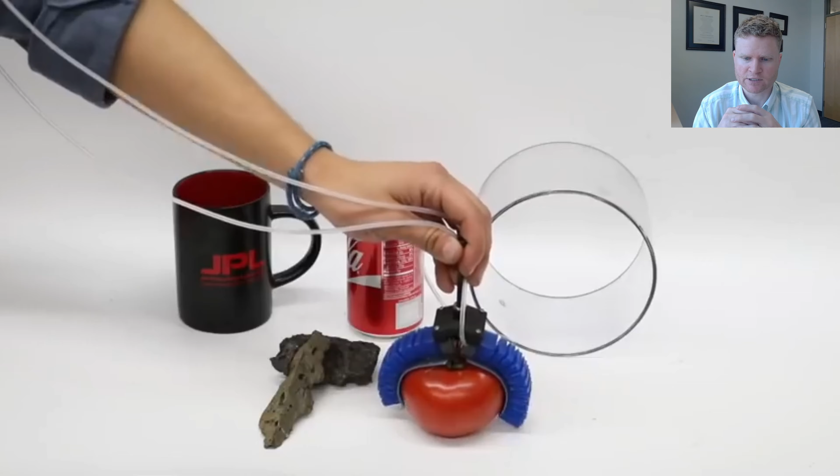That idea kind of reminds me of this video. Now in the video you can see a soft robotic gripper. It's got pneumatic actuation and different soft fingers that it can use to pick up different objects. You can imagine, because of the different actuation and kinematic structure of this system, that you might want to develop a different controller for your gripper than what you have for the other components of your rigid robot arm. So this will be one example of us developing different controllers for different components of our robotic system.

All right, so I want to talk about that a bit more in today's lecture. First, I'm going to talk about how you choose controllers for each individual robot joint. And then second, I'll talk about how you can make sure your control gains are going to be stable when you use these linear controllers.

But instead of thinking about the entire robot at once, what I'm going to do is break it down and try to develop different controllers for each one of these different links and joints. So let's focus in on this first component.

Now, I recognize that this has a revolute joint and a link attached, and I can model that dynamically as a mass damper, where the mass is the combined mass of the link and maybe the motor, and this damping is perhaps caused by some sort of friction within that motor.

I can actuate that motor with a force or torque tau, and I can change its position theta. So I've taken this coupled, complicated robotic system, and I'm looking at just a single joint, which I can now model with linear control techniques.

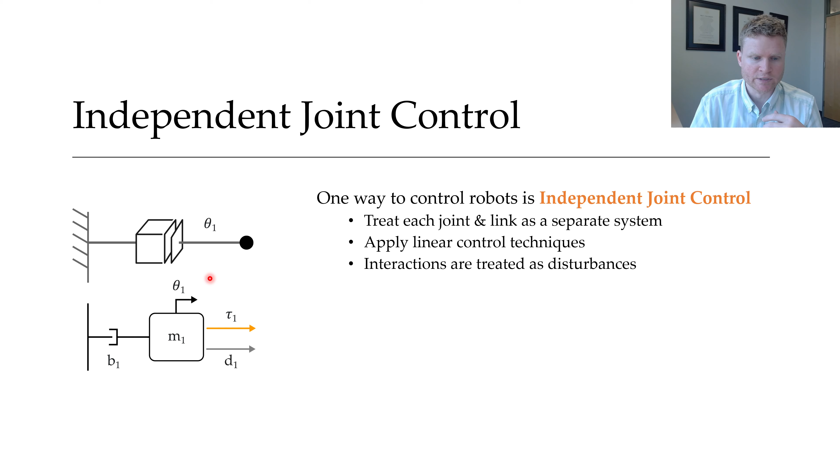The disadvantage of this approach is that I'm ignoring any interaction between the joints, and those interactions will now become disturbances that are applied to this link. So that would be this disturbance D1 right here.

In practice, it might look something like this. So let's focus in on this link of my robot arm. I've got some desired joint position, let's say 45 degrees. With my encoder or other sensors along my robot, I measure its current joint position. I send the difference to my controller.

This could be something like a PID controller. It'll output a force or torque, which I send to my motor, and then I use that motor to change my joint position in real time.

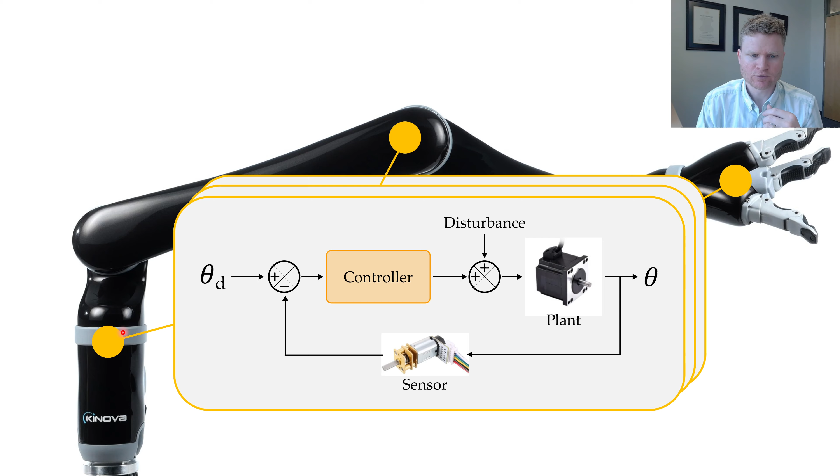I don't just do this process once. I do it n different times, once for each individual link of my robot arm. And that's the main idea for independent joint control. Breaking down my robot, looking at each of these individual joints as something that can be modeled with our linear control techniques, and then using these techniques to develop a stable and efficient controller for that joint.

So if we understand that general pipeline, how do we go about designing joint controllers that are going to work well for these specific joints? Well, the first thing we need to think about is something called stability.

And the reason stability is so critical is that I want to make sure that as I'm controlling my robot, it goes towards these desired positions. It doesn't start to oscillate and maybe break my overall robotic system. So the first thing I'm going to check for is the stability of my closed loop controllers.

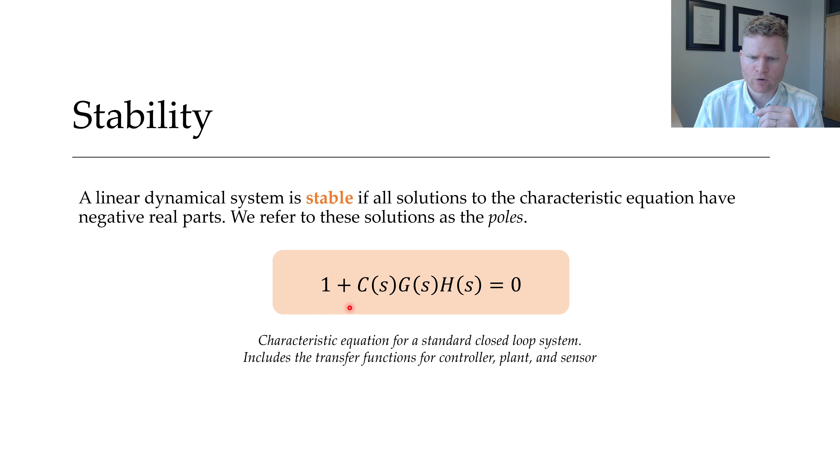Now, a linear dynamical system is stable if all the solutions to the characteristic equation have negative real parts. And I refer to those solutions as the poles. So here, this is my standard characteristic equation for our closed loop systems. It's 1 plus CGH equal to 0. And this includes the transfer functions for my controller, my plant, and my sensor.

To give you an example of how this could look, let's look at this equation right here. Imagine that your characteristic equation is s plus 2 times s minus 5 equals 0. Maybe pause the video and think for a second, if you had that, would you have a stable system? Hopefully you realize that no, it would not be stable.

One of my solutions is going to be negative 2, which has a negative real part. But the other solution is positive 5, and that has a positive real part. And so overall, one of my poles is in the right half plane.

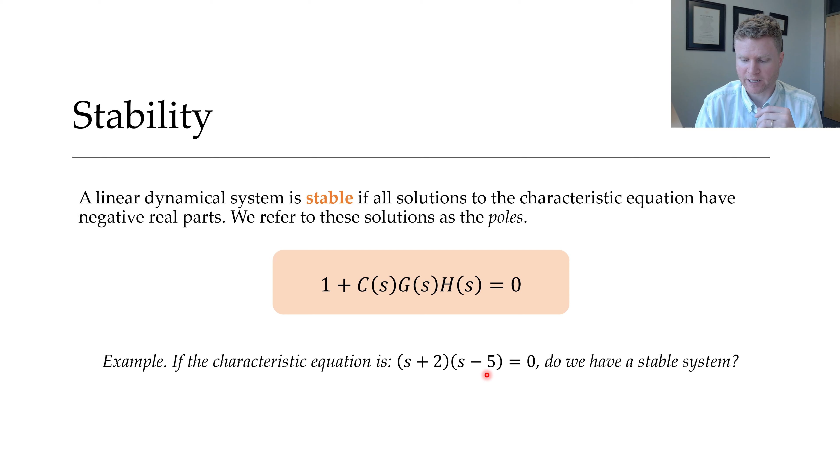Again, kind of a recap to controls, but if you've forgotten about the left half plane and right half plane, I can show you what they mean right here. So I'm plotting the real axis versus the imaginary axis. And then with these x's, I'm marking the solutions to my characteristic equation.

I'm marking the poles. Now, if a system is stable, all of your poles will have negative real parts. In other words, they will all be to the left of this imaginary axis. So you can see them over here. Now, this analysis is occurring in the Laplace domain, but if you want to think about it in the time domain, this just means that my system is going to converge to some steady state over time.

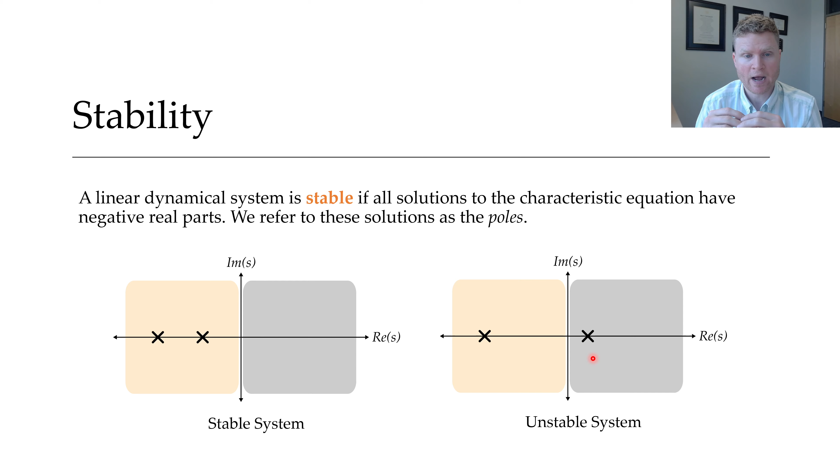Now on the right, I have an example of an unstable system. One of my poles is in the left half plane, and the other pole has a positive real component. So if any of your poles are in the right half plane, your overall system is unstable. What this means in the time domain is that you're going to have some exponential that is positive, and it's going to be increasing as a function of time. So the position of your system will continue to increase and eventually break whatever system you have. So stability is going to be really critical when we're trying to control our robot joints.

So how do I go about figuring out whether a given controller is stable, or how I can pick the gains for that controller in order to make sure they're stable? One really nice rule we have access to is the Routh-Hurwitz criterion.

The way you apply this criterion is you take your characteristic equation and divide it by the leading coefficient, so it looks like this. Let's say your characteristic equation is 5s squared plus 2s equals 0. You would divide that whole thing by 5, so you'd have s squared plus 2 over 5s equals 0. Then you'd have it in the right form to apply the Routh-Hurwitz criterion.

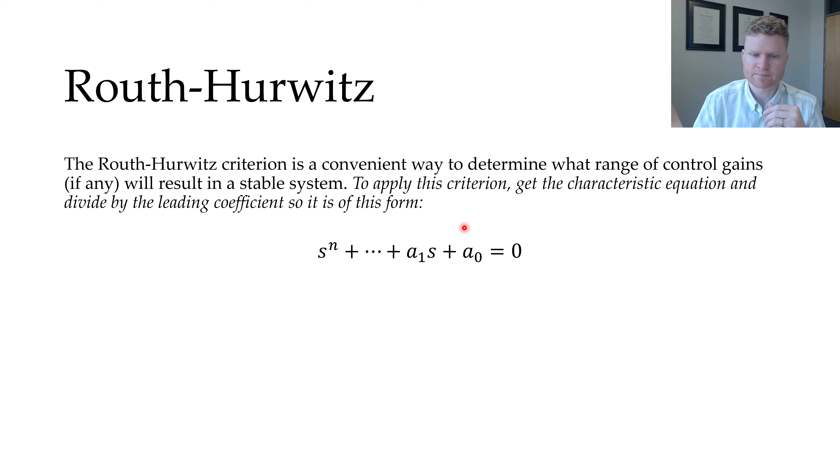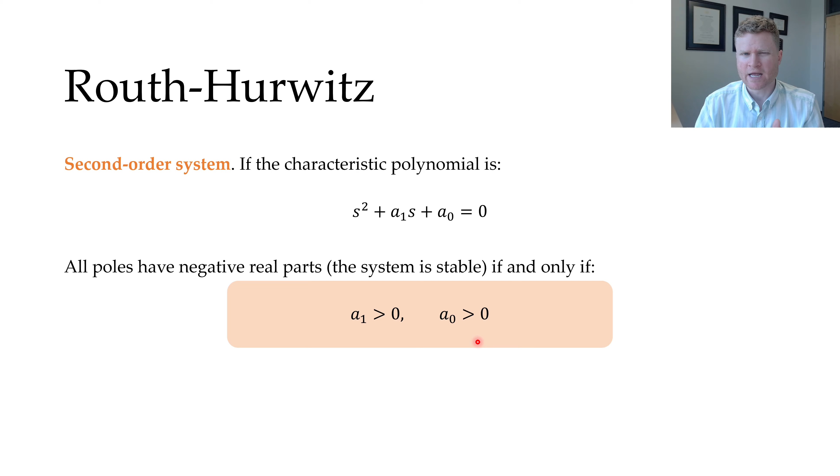Now, there are different rules depending on the order of your system. If your characteristic polynomial is a second order system, like this s squared right here, then this is the rule you'd want to apply. You'll have it of this form, and you check these two coefficients, a1 and a0. If both of these coefficients are positive, so a1 and a0 are both greater than 0, your system will be stable. You can pick any control gains that satisfy these conditions and still have a stable closed loop system. If this condition is violated, the system is unstable. It's a really useful condition to check, and you don't actually need to find the poles for this approach.

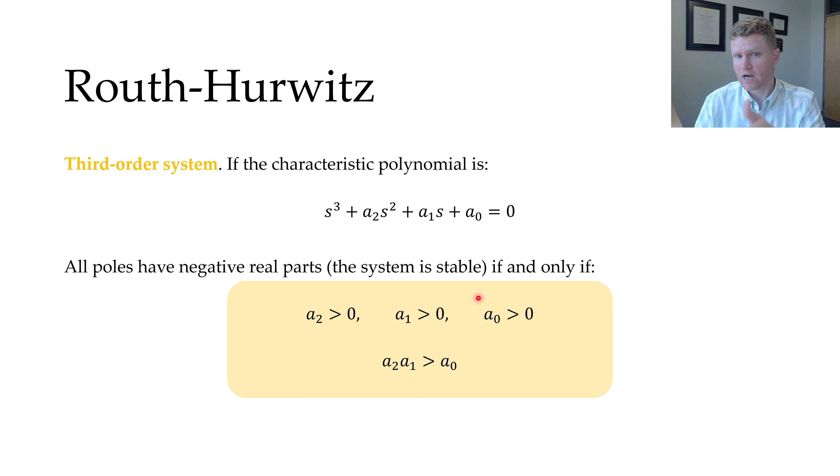That's for a second order system. Now if you've got a third order characteristic polynomial, like what you see right here, so you've got s cubed somewhere, then you'll be looking at the coefficients a2, a1, and a0. Again, they all have to be positive. Then there's a second rule that a2 times a1 better be greater than a0. If all of these are satisfied, your system's stable. If any of them are not satisfied, you have an unstable system. The same logic applies if you go to a fourth order system with an s to the fourth power in your characteristic polynomial. This can extend to higher orders, but I'll stop here with the fourth order system. Here are the rules you'll need to check to see whether or not your controller is stable.

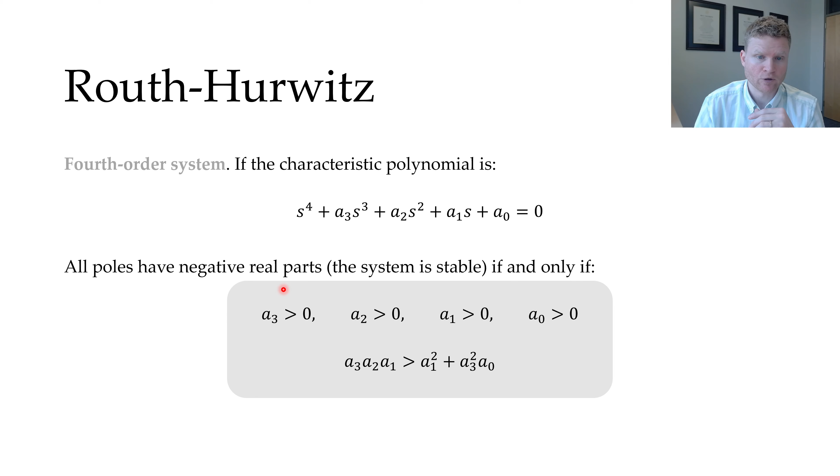Let's practice this concept with an example, and use the Routh-Hurwitz criterion to design a stable controller for our robotic joint. Let's say I've got one link of my robot. I've isolated this individual link, and recognized I can model it something like a mass spring damper. Here's the mass of that link and joint, modeled with a spring constant K, and a viscous friction, call that B. Here's the position of my link, and here's the torque I'm trying to choose in order to control this link. Again, the overall point of control is I want to make my system move wherever it is I want it to go. So I want to pick joint torques that will move my robot to some desired position.

Okay, so I've modeled my system. Again, this is a single input, single output system. My output will be my measurement of the joint position theta, and my input's going to be this torque that I'm choosing to apply to my link. So that's the system drawn here, and over here you can see the transfer function. This is my plant g of s, and it's 1 over ms squared plus bs plus k.

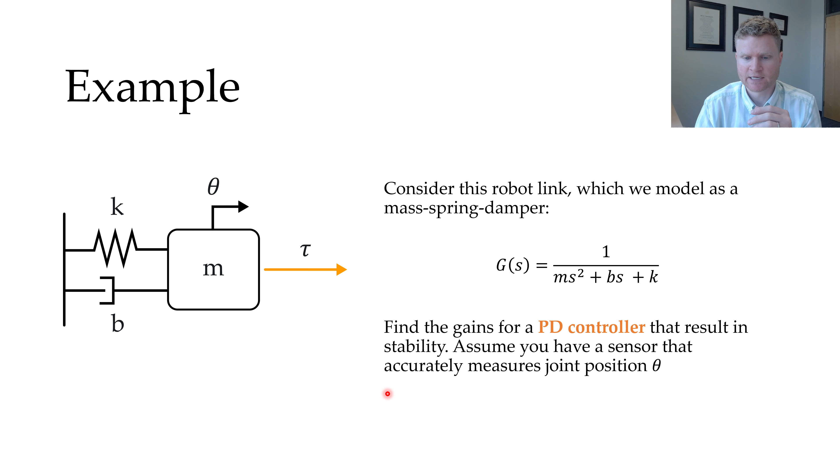In the problem, I'm asking you to find the gains of a PD controller that will result in stability. You can assume you have a sensor that accurately measures my joint position theta. So the first step is, let's see if we can write out the transfer functions for our controller and our sensor. For the controller, I mentioned I want to look at a PD controller. This is one of these PD controllers written in the Laplace domain. I have my proportional gain Kp, and that'll act based on my error in position.

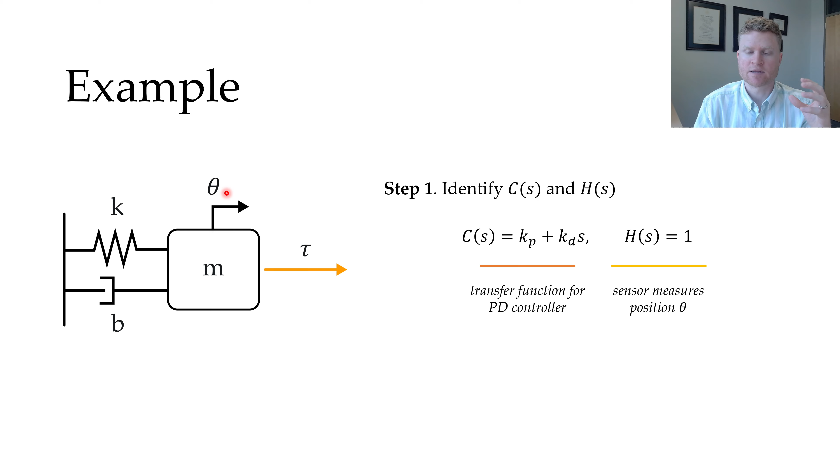And then I have my derivative gain Kd, acting on my error in velocity, so I've got my PD controller. Then on the right, I've got my sensor, and this is just H of s equal to 1, because my robot can accurately measure theta, so the sensor is just passing theta directly back for me to make control decisions.

Okay, now that I have G, C, and H, I can evaluate my characteristic equation. So right here is my equation for the characteristic equation: 1 plus CGH equals 0, and I can just plug in C, G, and H, and I end up with what you see on this second line.

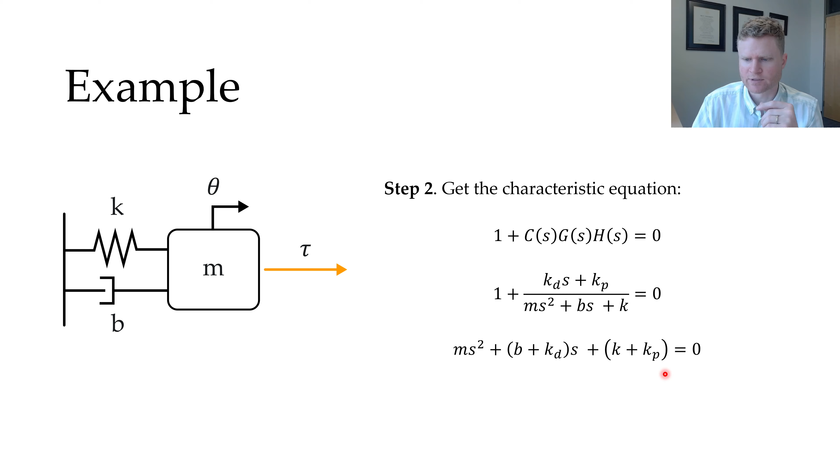I've got 1 plus a fraction, so to simplify this further, I'm going to multiply both sides by the denominator, this ms squared plus bs plus k, and I end up with what you see right here. So this is my characteristic equation, simplified down.

Now, my last step is I divide by the leading coefficient, so I divide all my terms by m. So I've got s squared plus, we'll call this a1 times s, plus a naught equals 0. And now I've got a second order polynomial.

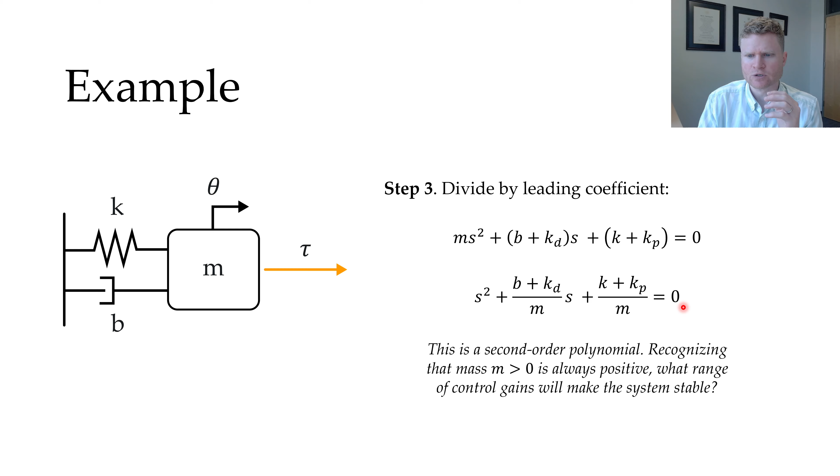So I can apply the Routh-Hurwitz criterion to check and see if this thing is going to be stable, and if so, what range of control gains will make it stable. Maybe you want to pause the video or flip back to the previous slides where we talked about these second order rules for the Routh-Hurwitz criterion, and you can see exactly what we need to do here. Hopefully you recognize that we can make this system stable if we satisfy two rules.

We acknowledge that the mass of my system is always going to be positive, and so the rules I need to follow are: B plus KD has got to be positive, and K plus KP has also got to be positive. So I can pick any range of control gains for KP and KD, so long as they satisfy these two rules. Now, that's for stability.

If you want to make sure your system has good performance, meaning it goes to that desired position quickly and accurately, you're going to want to tune these gains a bit more. That can be a trial and error process, but in general you probably want to increase your gains for more rapid responses. But when working with a physical robot, there's an upper limit, because as you increase these gains, you're asking your robot to deliver more torque more rapidly, and at some point you'll reach the limits of what your robot can actually achieve.

Okay, so this is an approach I can use in order to find the range of control gains that are going to be stable for my individual joint.

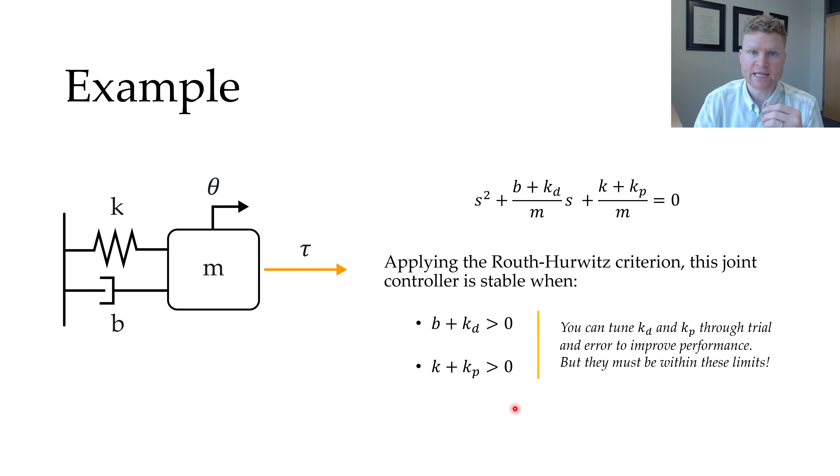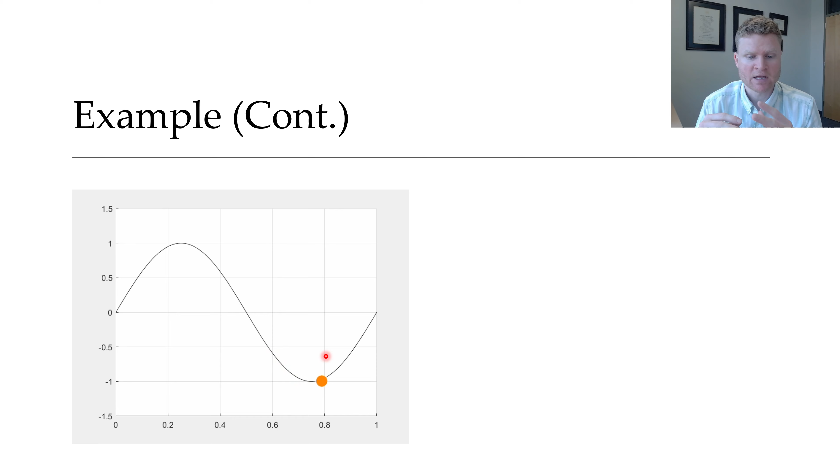Here's a visualization of that process. On the x-axis, I have time, and on the y-axis, I have my joint position. This line you see right here is a trajectory that I want my robot to track, the position I want for this joint as a function of time. In orange, I'm plotting the actual position of my robot using the controller we just talked about. You can see I've picked control gains that are stable, so my robot pretty accurately tracks the reference trajectory. This is us using control to move my robot joint to do the task I want.

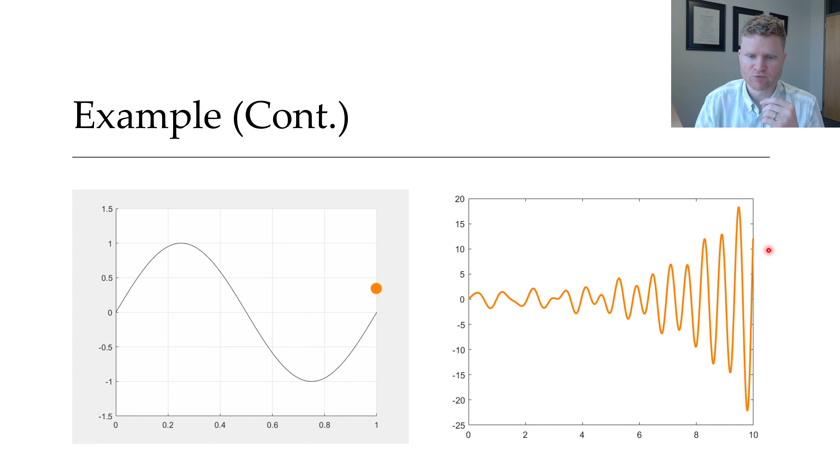Okay, so in today's lecture, we talked about how you can choose controllers for each individual joint of your robot, and how we can use linear control techniques to pick those controllers. This was a lot of recap of linear controls, and we highlighted the Routh-Hurwitz criterion and how you can use it to make sure your controllers are stable.

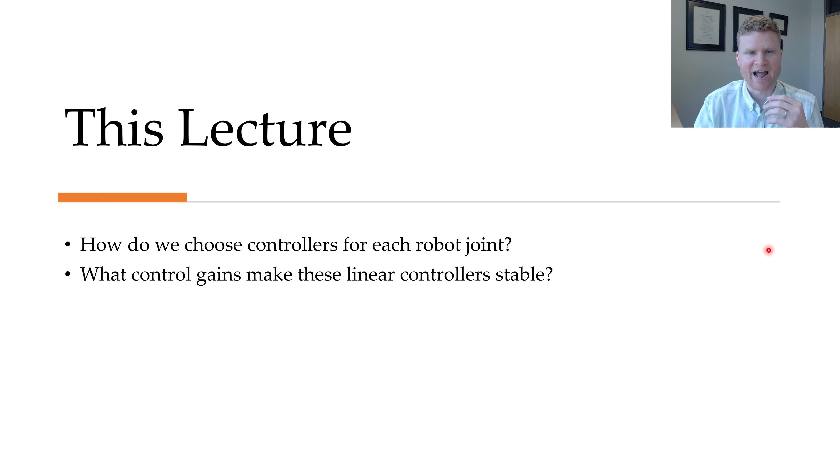Once you've gone through that, I want to switch gears and still think about control, but instead of trying to control each individual joint separately, let's see if we can come up with one unified controller for our entire robot arm. So I'll see you in our next lecture.